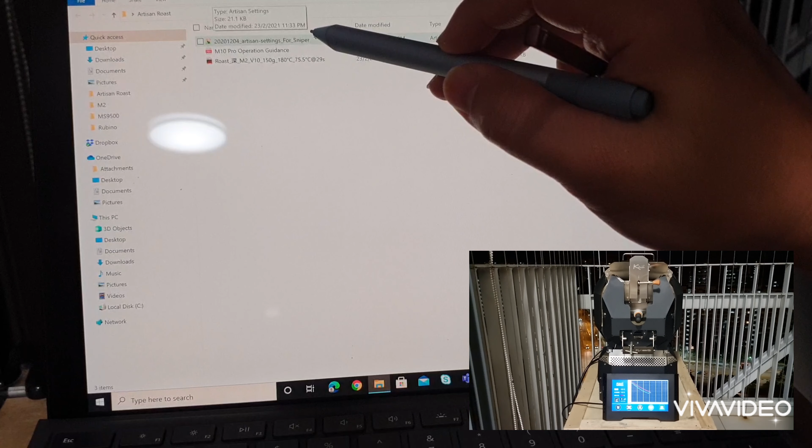I'll be coming back to this later. Before anything, you should have tried to connect your laptop to your M10 Pro by the Bluetooth function. And before you do anything, you have to make sure that your automatic roasting switches are on the M10 Pro.

I think at the back of your M10 Pro there are three switches, right? The three switches should be all switched on to the automatic position. I think it's indicated as on and off. Let me check which button it is now. It is now at the on position.

This means that in order for you to do auto roasting, you have to make sure that your M10 Pro is switched to the on position for all three switches. So make sure that you do that first.

Next, of course, is your connection to the Bluetooth. So what you can do is, let me remove the Bluetooth first. Show Bluetooth devices. You can see at the moment my Kaleido, which is the M10 Pro, is already connected. So I'll remove this device first.

Now I'll try to add a Bluetooth device on my laptop. Choose a Bluetooth, and you can see that Kaleido is actually appearing on the list of Bluetooth enabled devices. Make sure you choose the Kaleido. They'll be asking for a pin - the pin is just 1,2,3,4. So connect. Your device is ready to go. Then you click done.

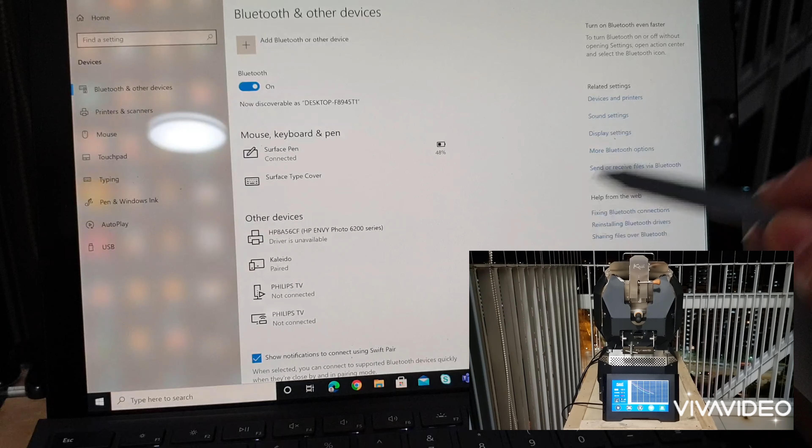Close this. There's one more thing you have to know - to check where your Bluetooth COM port is. On my laptop the COM port is actually at COM3 or COM5, and I've checked that COM5 is the working one and not COM3. So how do you check which COM port is actually your Bluetooth port?

You can go to your device manager, open it, and they will show you a list of all the devices connected. You can see that there's an existing port here. Just click on port - you can see standard serial over Bluetooth link. On my laptop, it shows COM3 and COM5. At the moment, I'm actually using COM5. So once you have checked that these two are shown, you'll roughly know which COM you'll be using.

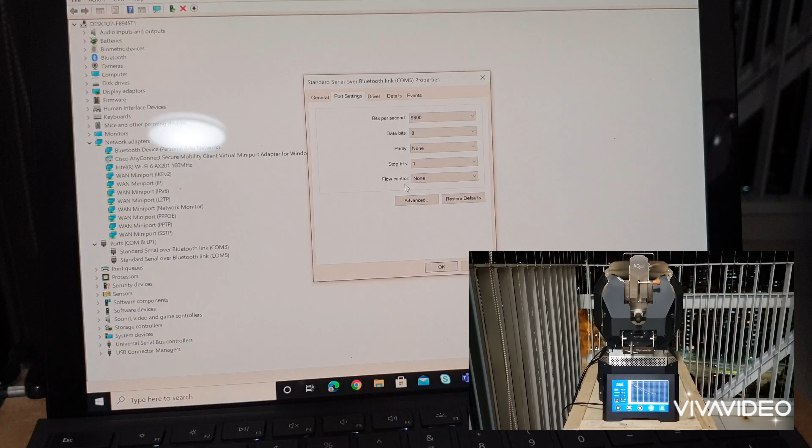Before you close this window, you may want to check what is the baud rate for your COM before you exit this. You can go on to the property, then port setting. You can see that my baud rate is actually 9600. Make sure this is the baud rate. You may want to use your camera to take a photo of this so that you will not forget. So let's click OK, and close.

Okay, now you have to install the Artisan software. The Artisan software is free to download, you can actually download it from the Artisan website. I'm using a Windows version, so I have already downloaded the Windows version. For the Mac version, because I'm not a Mac user, I'll try to get a friend who is using a MacBook to help me configure and see whether it works on the Mac. Technically, it should work on the Mac as well. So let's start the Artisan.

Okay, you should see this, right? To know whether your Artisan is working, let's go to config, then go on to devices. There's a few things you have to change.

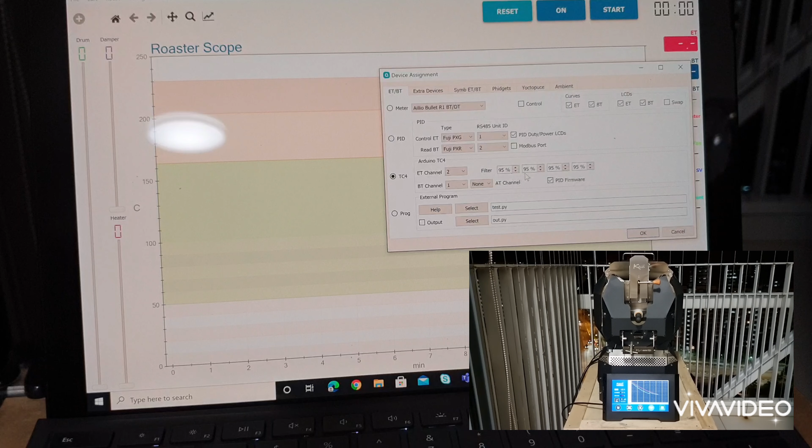First of all, under meter, you can see that there's a control here. The controller button should be off, you shouldn't turn it on, leave it as off. Next, you should be choosing TC4 because the communicating hardware with your Bluetooth on your laptop is actually connected through TC4. Make sure all the filters are at 95%. All these values should be changed to 95%, and then you should click OK.

And the next thing to ask for is your COM port. You can see that my COM port is 5, but you can see the baud rate is actually wrong. The baud rate should be set to 9600, so I'm going to change this to 9600, and you click OK.

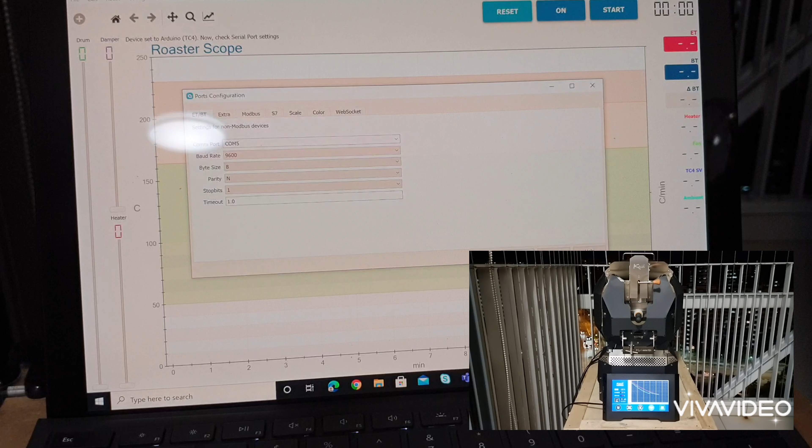Wait for a short while. Let's try to click on. You can see that now all my thermocouple, digital probe is actually detecting the temperature inside the roaster. So once the temperature is on here, you can see the display of temperature, you know that your Artisan is properly connected to your M10 Pro.

I think it should be working the same as your M2 Pro, should be the same procedure. Give it a try and let me know in the comments below whether it works for your M2 Pro as well. But today's video is mainly for M10 Pro and Windows users. I'm sorry that I don't have a MacBook, if not I could actually test whether the MacBook can be connected as well. Technically it should be, so it should be able to connect.

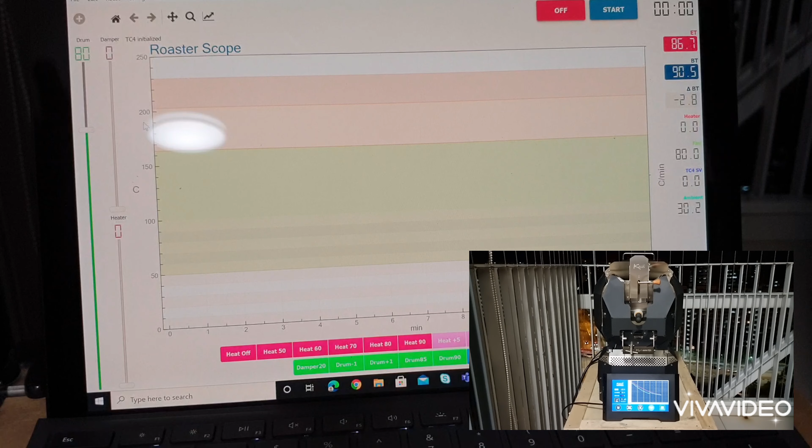So now let's test whether I can do all the control. You can see there's a drum here. By right, if I slide the slider here, my drum should start to rotate. Okay, let's set drum to 80%. There's a slight delay in the transmission of data, so the drum will start to rotate in a short while. Let me zoom in to bring you a closer view.

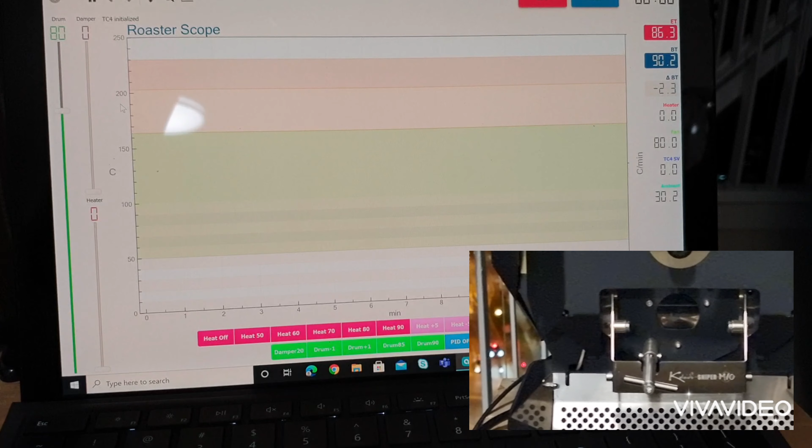Okay, now you probably can't see because the heater is not on, so you can't really see the drum rotating. So let me switch on the heater. This is a slider bar which shows the percentage of heating power. So I will try to switch on the heater to maybe about 50%, and see what temperature we will be reaching.

So now I have switched on the heater to 50% and drum to 80%. In a short while, you should be able to see that the heating tube should be switched on shortly. Let's wait for a short while.

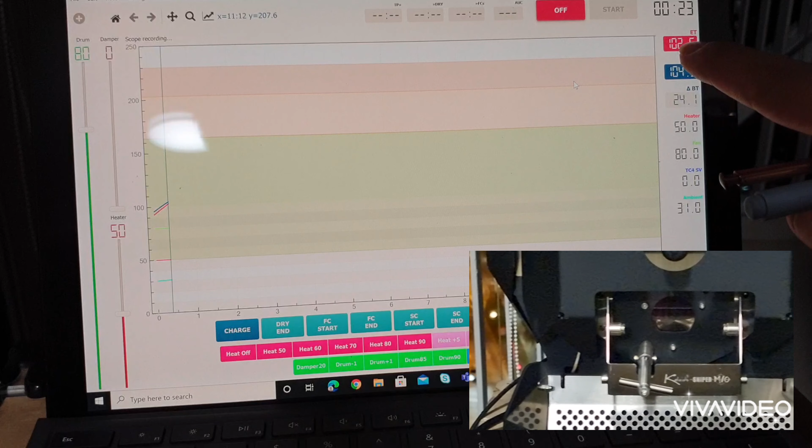Actually, you can see here my bean temperature is already rising. Yep, I can see the drum, the heater inside is actually switched on, but because I'm switching it on only at 50% power, it's not really brightly lit up. But definitely you can see that my bean temperature and my air temperature is rising. So let's wait for a while to see what is the highest temperature that the heater can reach at 50%.

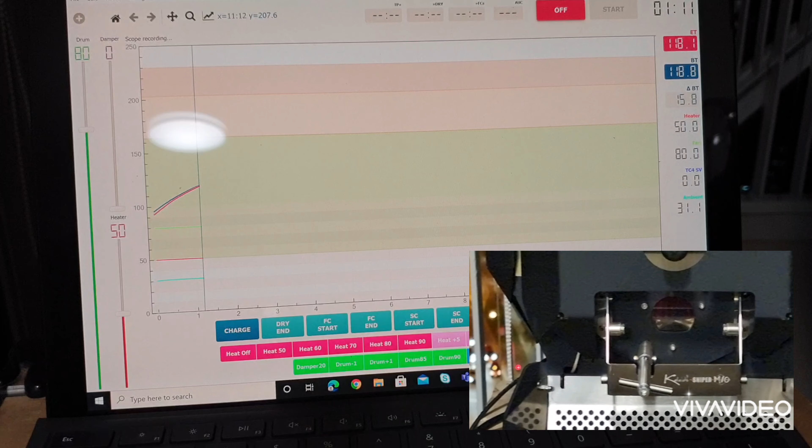I'm not too sure whether I can switch to adjusting the temperature rather than the percentage, but because this is actually my first time controlling the roaster using Artisan software, there's quite a lot of things for me to test before I actually start to use the auto roast function.

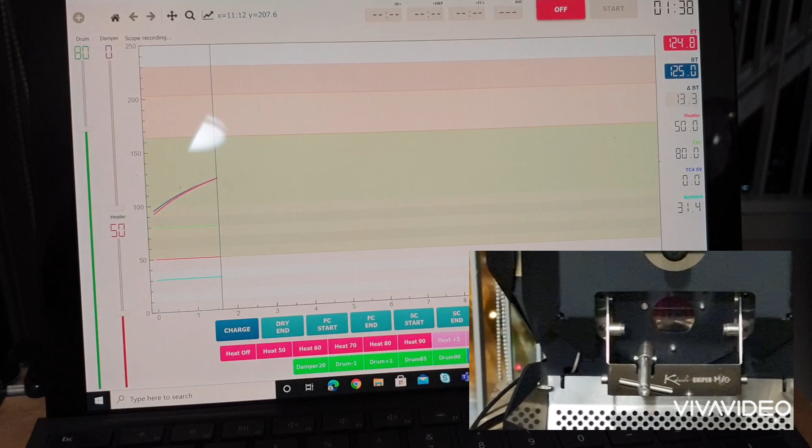So the temperature is climbing, as you can see on the graph here, as well as if I zoom out, you can see on the built-in LCD here the graph is also rising up, and on this graph you can see it's rising up too. You can also read the temperature here, it's pretty consistent. So let's wait for a while to see how high the temperature can go at 50%.

So it's important for me to note this down because I need to know what will be my charge temperature. At 50%, what is the highest temperature it's going to be, right?

If you are seasoned with Artisan, please help us here because I'm actually quite a noob in this auto roasting using Artisan. So expert, please help us. If you have been using Artisan to roast coffee beans for a while, please enlighten us and help us by telling us, is there any setting I can do so that I can display the slider bar in terms of the temperature of the heater rather than the percentage of the heating power? I think that will be more convenient than just displaying the percentage of power, because now I need to really experiment with the percentage so that I will know roughly what the temperature display here will be.

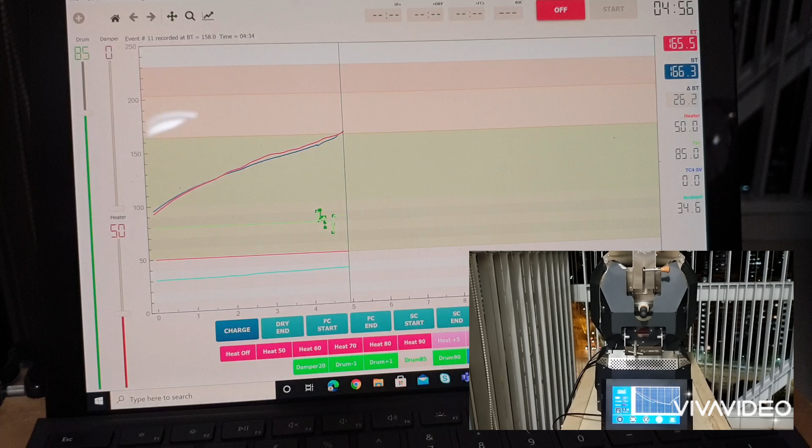Okay, I just clicked the drum 85% button, so you can see that the drum is starting to rotate. Just now when I adjusted the slider bar, it didn't really start the drum spinning. But when I click the button here, it actually starts the drum spinning. So that could be some area you can explore. Let me bring you closer to see whether you can see the drum actually rotating now.

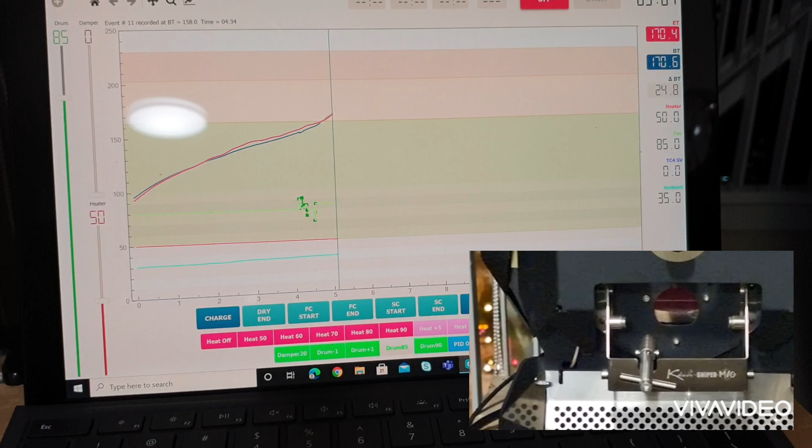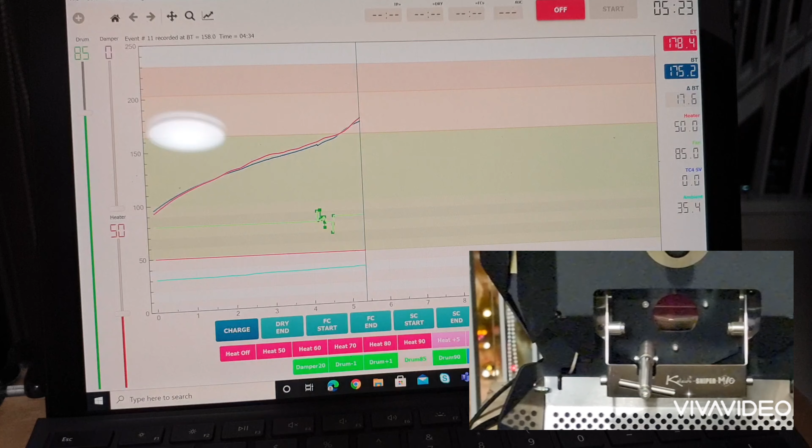I think from this distance, from this camera, you can actually see a slight glow inside the drum. That shows that the heater is still heating up. At the moment at 50%, I'm reaching about 178 degrees Celsius. The air temperature is already 180 and it's still going up. So that means 50% of the heating power can at least reach 180 degrees Celsius.

And it takes about 5 minutes to gain that temperature. Apparently the temperature is still going up. So if you are charging your beans at 180 degrees, I think you have to set the heating power to be less than 50%. It's still going up.

I'm dropping the heating power to 45% to see whether I can reduce the charge temperature, but usually I charge the beans at 180 degrees Celsius. Apparently if I reduce by 5%, the temperature has stopped, but it's still increasing slightly. It's still increasing, so let's try to reduce another 5%.

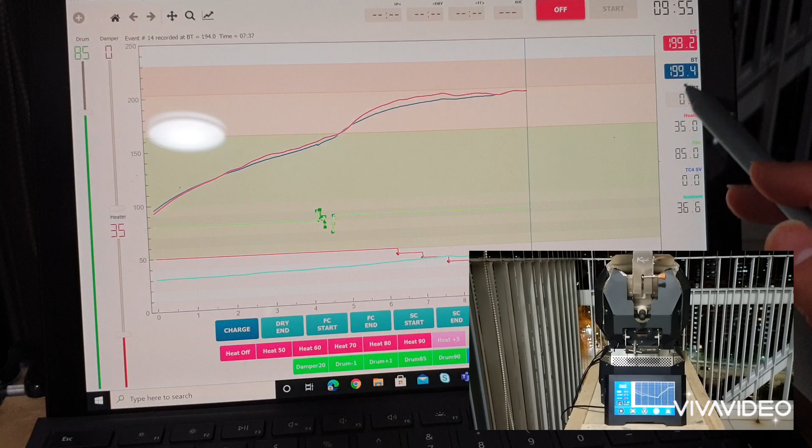So I think I'm safe to say that the benchmark for 35% heating power should be around 195 to 200 degrees Celsius. Let's drop another 5% to see what temperature it will take us. Now I'm dropping the heating power to 30%. By right, my air temperature should drop further. Again, this will take some time.

It's increasing again, that's a bit strange. Again, as an electric heater, there will be some delay. Temperature is dropping again, so now it's dropping to 202. 201. It continues to drop.

It's increasing back. Okay, I'm not too sure because this is my first time using the Artisan software. For the experts out there, please help us. Is there a way I can input the target temperature I want to reach without just controlling the slider on the heating power? Is there a way for us to do that? Otherwise this will be quite difficult for us to actually control the charge temperature.

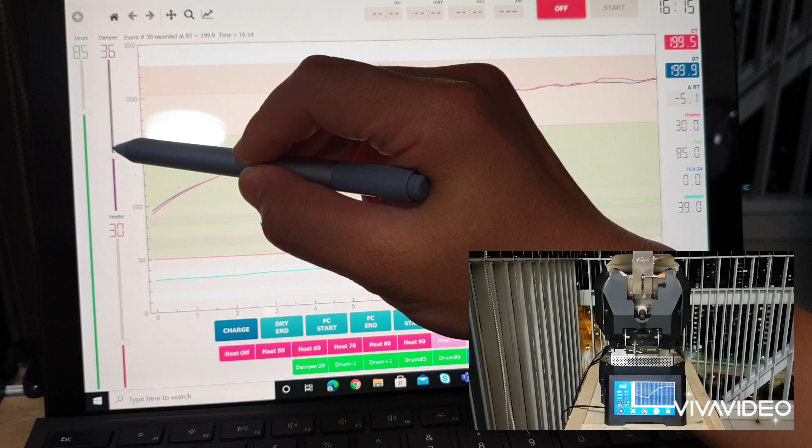So this is another thing that's a bit fuzzy, which is actually the exhaust fan speed control. This is a bit hard to control again. It doesn't start when it goes more than 0. You only start to activate the exhaust fan speed at around 24 to 25%, and it maxes out at about 44 to 45%. So if you increase, even to 100%, it doesn't increase the fan speed further.

Now if you look at the temperature, it's starting to drop back. At 30% heating power, it is dropping back to about 194 degrees Celsius. I think this should be the temperature that I'm looking for, and not the 200 plus degrees Celsius. So do note that whenever you adjust the heating power, it will take some time for the roaster to actually react to the change in temperature. So now this is the correct demonstration of the temperature, it should be dropping. Let's see how low it can drop before the heater kicks in and starts to heat again. Right now it's 190, it's dropping further.

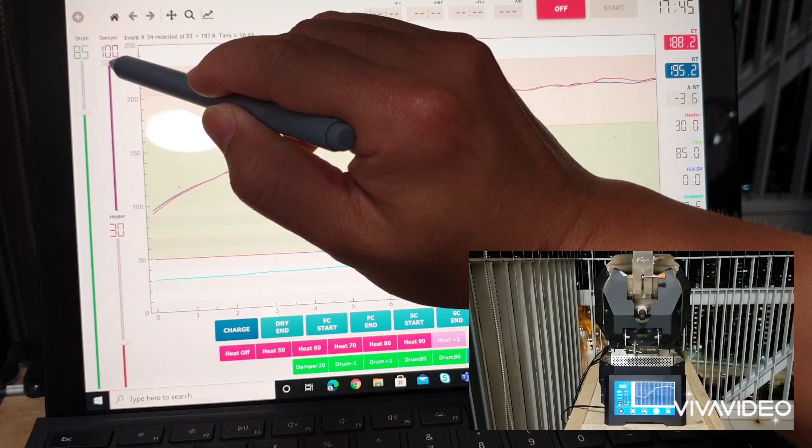I think the reason why it's dropping is because I turned on the exhaust fan. Let's close the exhaust fan and see what will happen. You can see that the moment I decrease the exhaust fan, the temperature starts to rise again. So that means, sorry about my information just now, it was actually wrong, because even though at heating power of 30%, the heating seems to be still quite high. So what I'm going to do is drop by another 10%. Let's drop to 20% and see what will be the highest temperature it will go.

Right, this is going to be a longer video. I'm just experimenting to see what all the percentages mean in terms of temperature reading.

You can see that temperature is still going up, it's now crossing the 200 degrees Celsius mark. This is the part I find quite puzzling. Why at 20% heating power is the temperature still increasing more than what I get at maybe 40% or 45%? This is something I need to learn. Probably tonight I couldn't find out why this is acting up this way, but definitely I will try to play around with Artisan connected to my M10 Sniper Pro to find out what all this control means.

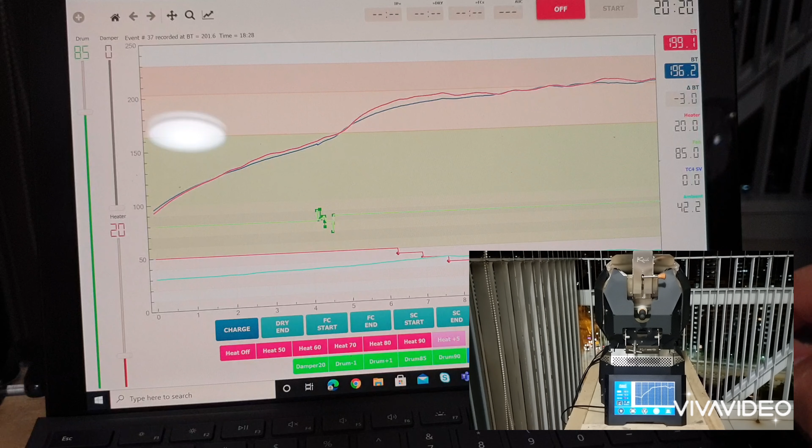Right now it's at night, so it should be around 27-28 degrees Celsius, definitely not heating up at 42.2. So at 20%, I'm actually still hitting about 198 degrees Celsius. It is dropping, but I'm not too sure how low it will drop to.

I think for today's video, the purpose is actually to show how you connect your Artisan by Bluetooth to your M10 Sniper Pro, and I think I've achieved that. I've also shown you the various settings you need to do on your laptop when you switch on your Artisan, and to check your COM port and your baud rate. All this you must make sure is properly chosen, otherwise the Artisan will not read any data from your M10 roaster. So apparently at 20% heating power, it is still gathering about 197 degrees Celsius.

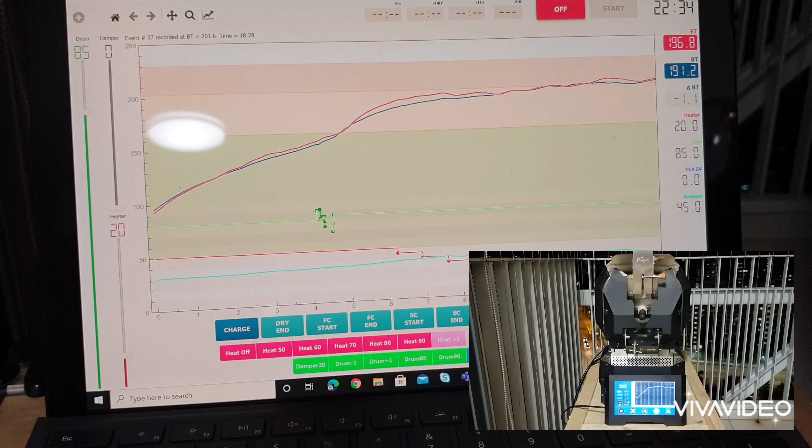So I'll probably try it out by increasing the heating power by small increments in percentage, rather than what I've done previously, increasing all the way to 50%. I think it's a bit hard for the roaster to lose heat because it's quite well insulated inside, so once you achieve a very high temperature, it's quite hard for the temperature to come down. So what I should do is increase at 5% intervals, and then record the highest temperature achievable at 5%, maybe at 10%, 15%, 20%, and so on, so that I can properly know the charge temperature I want to set.

So now you can see it's dropping to about 194 degrees. Anyway, that's what I aim to do in the next session. I hope this doesn't bore you too much, and I hope you have learned with me to gain some new insights on the connection between Artisan and your M10 Sniper Pro.